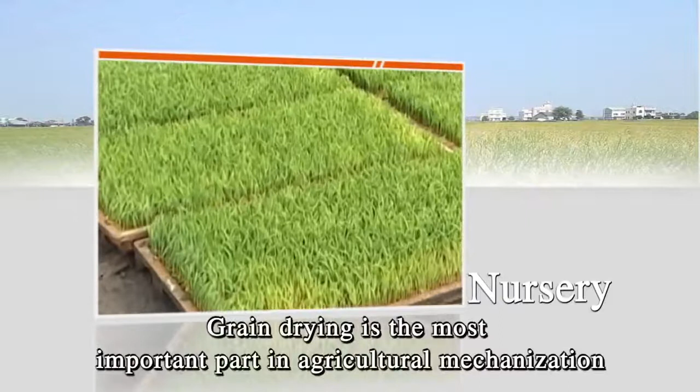Grain drying is the most important part in agricultural mechanization. It not only solves the grain mildew problem, but also enables people to eat fresh, clean, and healthy rice. Grain drying mechanization also ensures that farmers have complete control over the harvest.

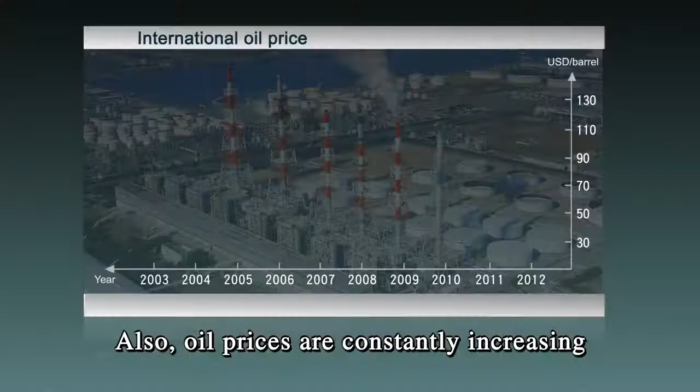Fuel-type grain dryers consume a lot of energy and produce lots of carbon dioxide. Also, oil prices are constantly increasing. Therefore, the increase of drying costs becomes farmers' biggest burden. For those countries with lower grain prices, farmers can afford to buy dryers but cannot afford to buy diesel.

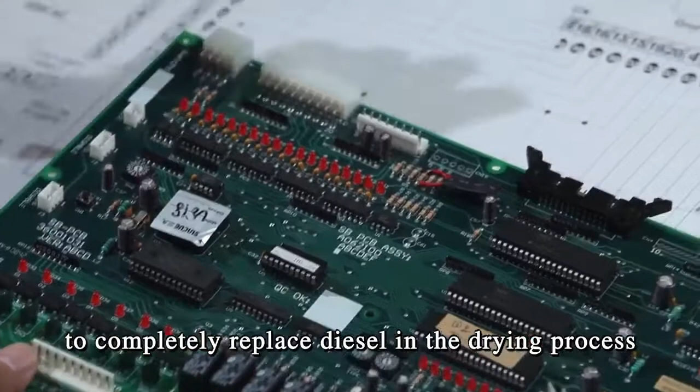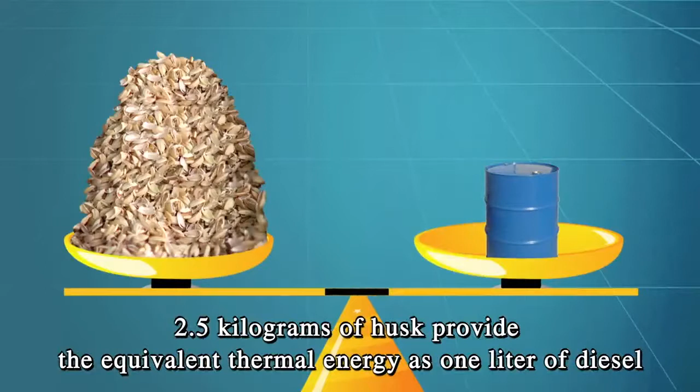In order to help farmers reduce high fuel costs when drying and decrease carbon emissions, SUNCUE has successfully developed an innovative and patented technology by using paddy husk to completely replace diesel in the drying process. Husk is the hull of paddy, which is also rural waste, but contains high thermal energy. The thermal energy generated by 1 kilogram of paddy husk is about 3,000 to 3,500 kilocalories. 2.5 kilograms of husk provide the equivalent thermal energy as 1 liter of diesel.

SUNCUE Husk Furnace has earned the patent on complete combustion technology. Husk milled from 1 hectare of paddy can dry 3 hectares of paddy, and husk from 1 ton of paddy can dry 3 tons of paddy. This triples the efficiency.

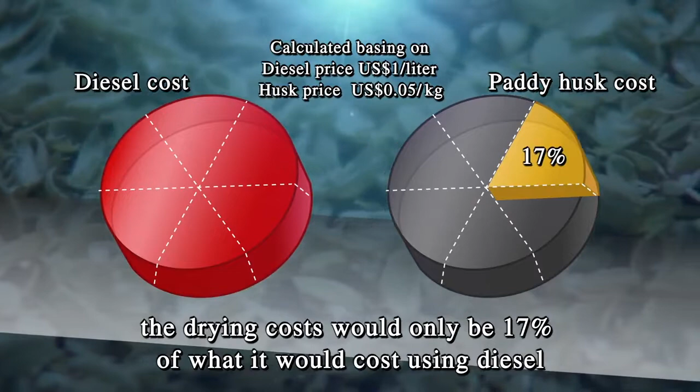The annual production of paddy, corn, and wheat in China is 474 million tons, which consumes fuel expense of about $69.5 billion US. If we use paddy husk to replace the diesel in drying, the drying costs would only be 17% of what it would cost using diesel. Costs are also far lower than drying by sun, and the rice quality is much better. Paddy husk is biomass energy, and its net carbon emission is 0.

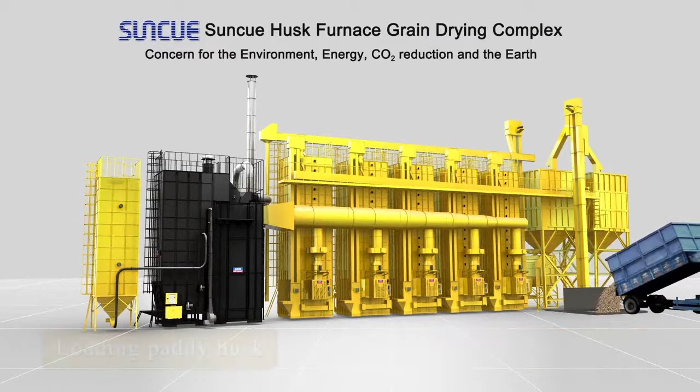After harvest, the farmers deliver wet grains to a SUNCUE Husk Furnace drying center. During the loading, the furnace's computer will auto-calculate the required husk feeding volume and blow into the furnace. Then the hot air will pass through heat exchangers, and only clean air will be sent to dryers.

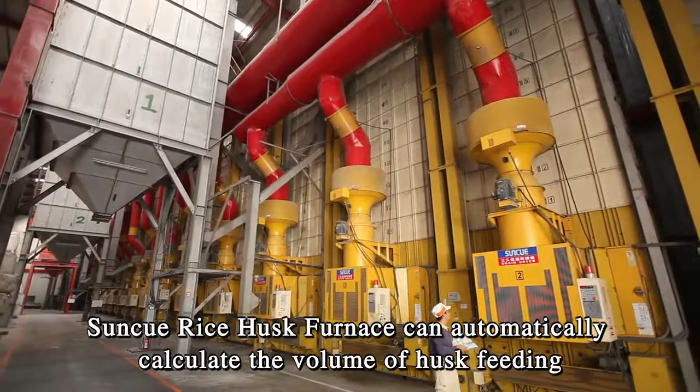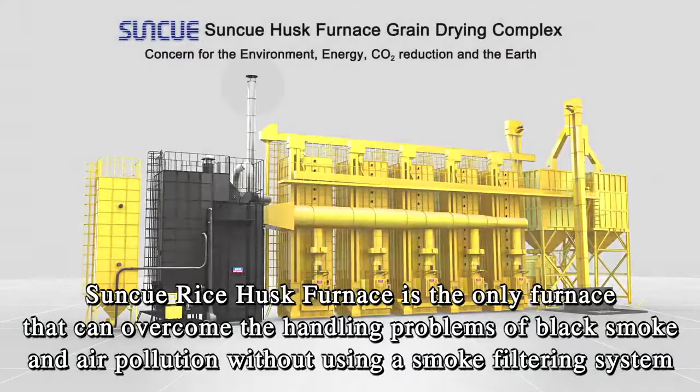SUNCUE Rice Husk Furnace can automatically calculate the volume of husk feeding, auxiliary air, hot air, and ash discharge based on the operating dryer units and the hot air temperature setting, so the husk is under perfect combustion. SUNCUE Rice Husk Furnace is the only furnace that can overcome the handling problems of black smoke and air pollution without using a smoke filtering system.

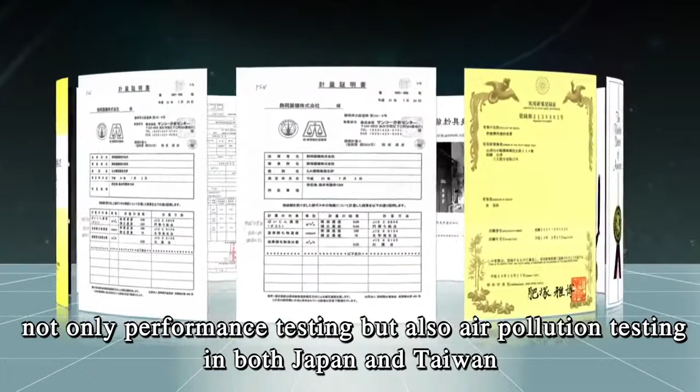In addition, SUNCUE Furnace is exclusively passing not only performance testing, but also air pollution testing in both Japan and Taiwan. SUNCUE Rice Husk Furnace uses a negative pressure and indirect heating system, which neither contaminates grains nor corrodes the dryers.

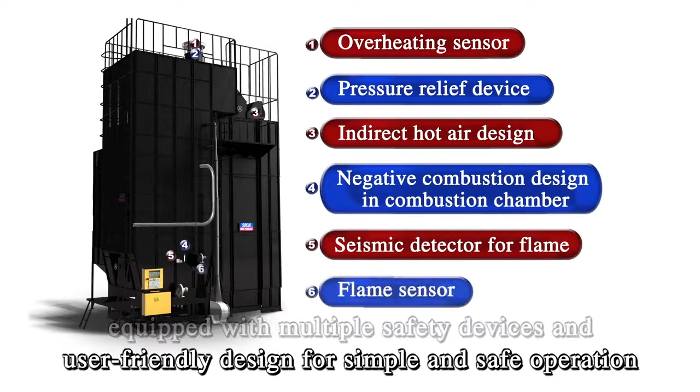SUNCUE Furnace is also exclusively equipped with multiple safety devices and user-friendly design for simple and safe operation.

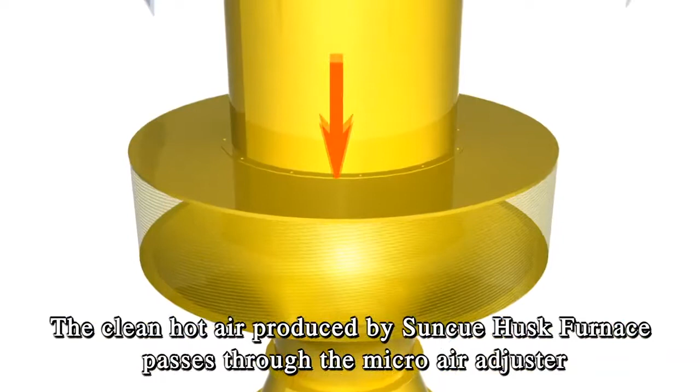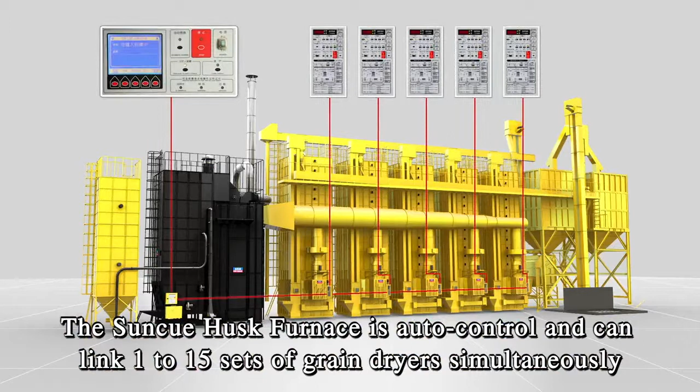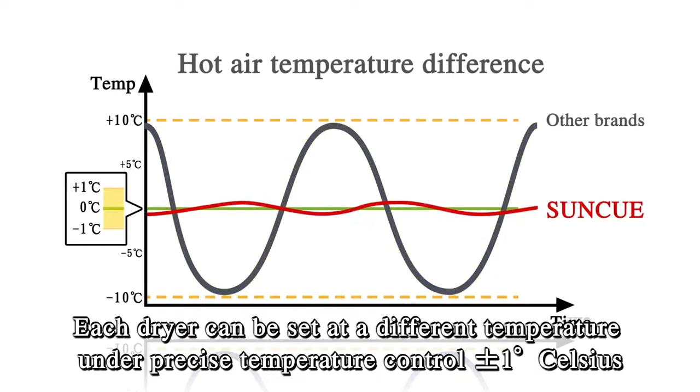The clean hot air produced by SUNCUE Husk Furnace passes through the micro-air adjuster, mixes with cold air evenly, then enters into grain dryers. The SUNCUE Husk Furnace is auto-control and can link 1 to 15 sets of grain dryers simultaneously. Each dryer can be set at a different temperature under precise temperature control, plus or minus 1 degree Celsius.

SUNCUE husk furnace drying complex utilizes fully automatic control. Thousands of tons of grains can be managed by a single operator every day. By applying even, low temperature and speedy drying techniques, grains can benefit from high quality, high price, and high germination rates. Ash can also be used as organic fertilizer, soil improvement, or heat insulating material.

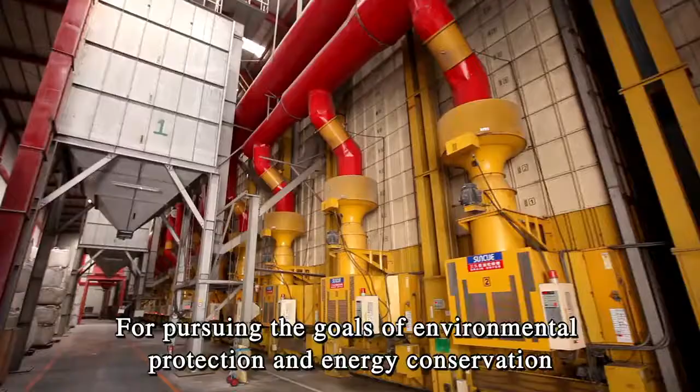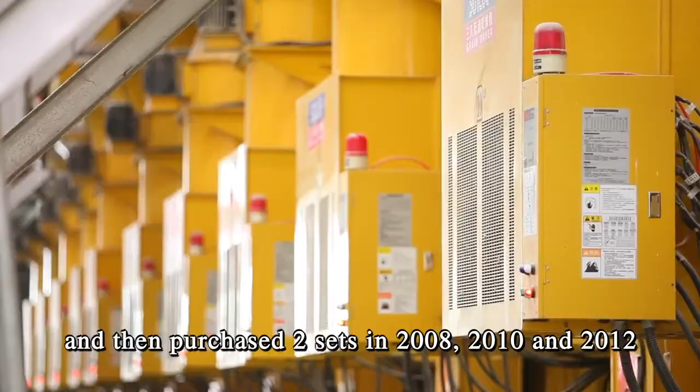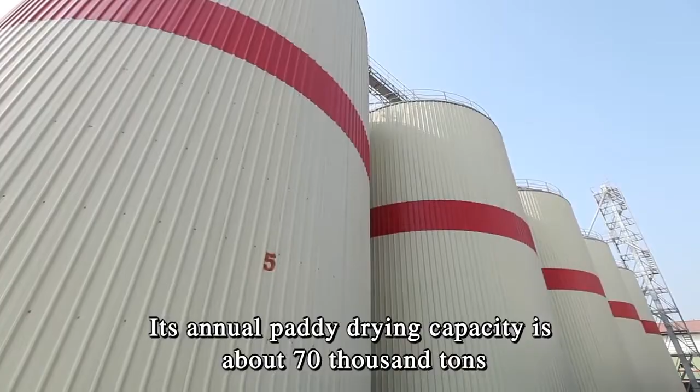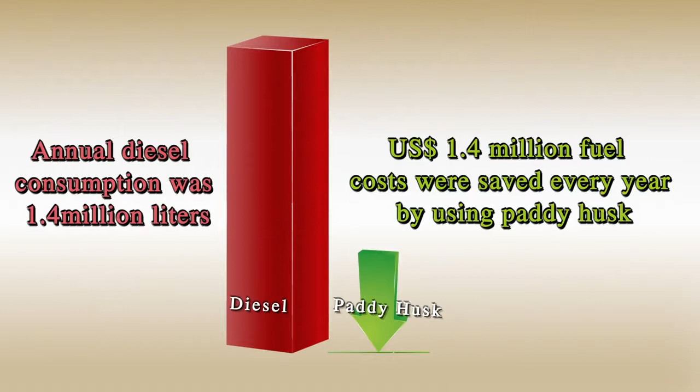Its annual paddy drying capacity is about 70,000 tons, which consume around 1.4 million liters of diesel. $1.4 million of diesel expenses were saved after using self-milled rice husk. 3,780 tons of CO2 emission was also reduced as a result. Union Rice is praised as an advanced green enterprise, and its high-quality rice has been successfully exported to Japan.

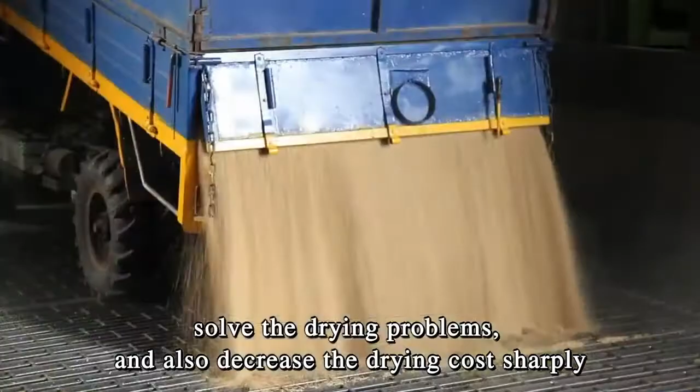We started using SUNCUE husk furnace in 2008. It helped us dry wet grains for all farmers in town, solve the drying problems, and also decrease the drying costs sharply. This husk furnace brings us high quality and higher price small package rice, and also an enormous increase in sales. We are all very satisfied.

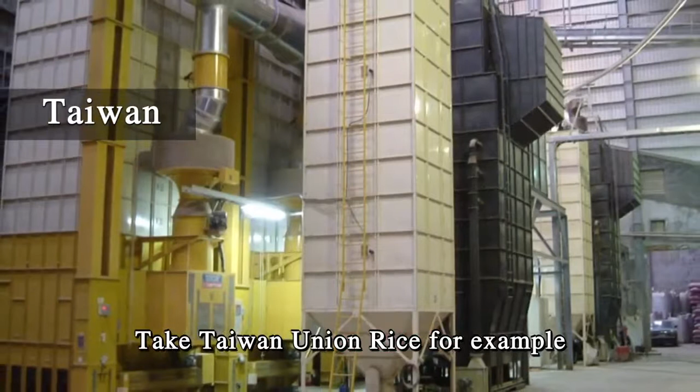SUNCUE husk furnace grain drying complex creates the best rice quality at the lowest drying cost. In Taiwan, SUNCUE has many successful installations among all farmers' associations and rice mills. Take Taiwan Union Rice for example: they use SUNCUE husk furnace 120 days per year, and each set can save fuel cost up to $175,000 each year.

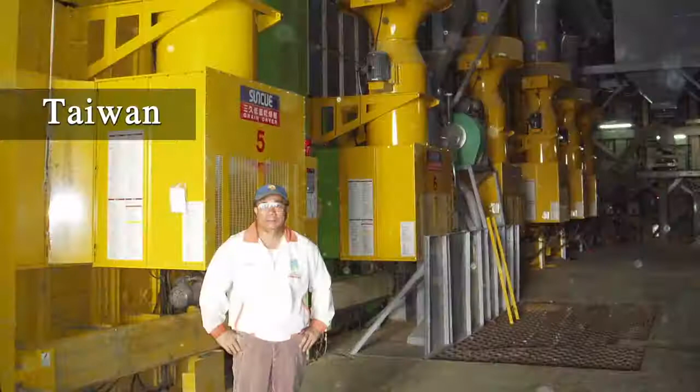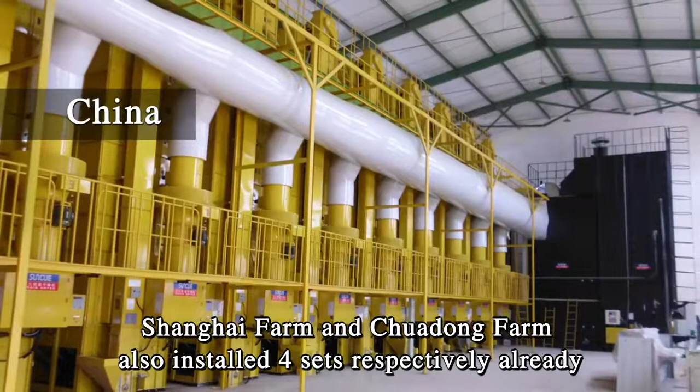The Liaoning Dingxiang rice mill in China uses SUNCUE husk furnace 270 days per year and saves $450,000 annually. Shanghai Farm and Chuadong Farm also installed 4 sets respectively already.

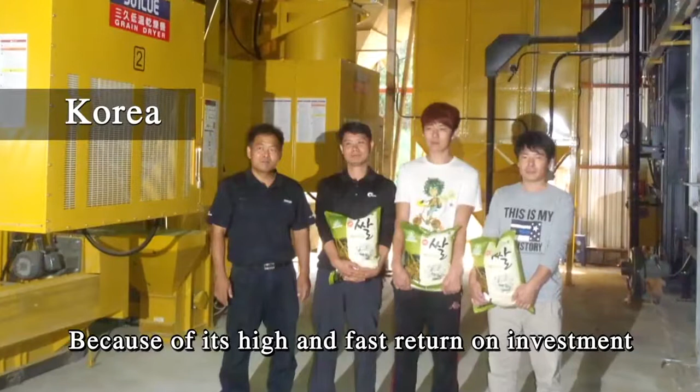SUNCUE husk furnace has successfully exported to Japan, Southeast Asia, Europe, Latin America, and other countries. Because of its high and fast return on investment, as well as its excellent performance in energy conservation and CO2 reduction, our customers consistently purchase and expand their business scale.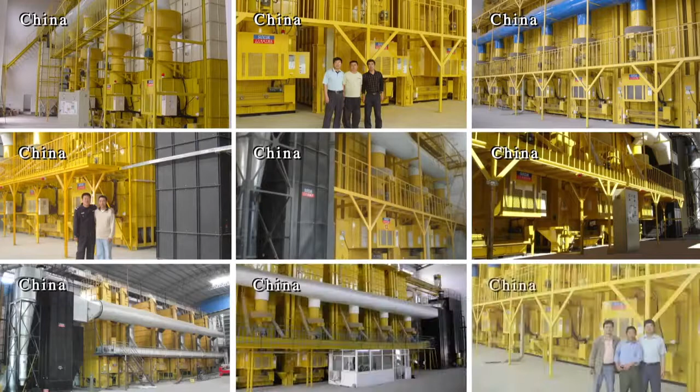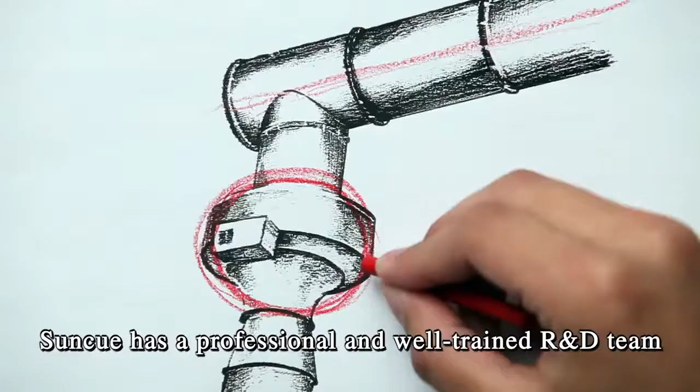SUNCUE, established in 1966, is the leading manufacturer of grain dryers with superior research and development capability. SUNCUE has a professional and well-trained R&D team who specialize in hydrodynamics, thermodynamics, combustion, and mechatronics. We also use 3D computerized design in drying technology.

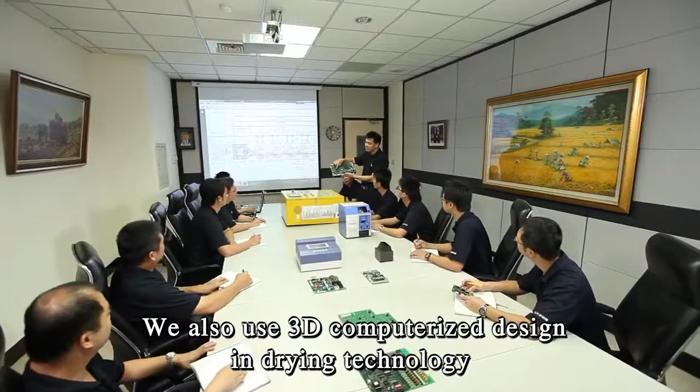SUNCUE implements module-based, standardized, and automatic production. We insist on high quality and steady performance of products.

With advanced R&D competences, SUNCUE husk furnace was awarded the National Invention and Creation Awards Contribution Award, Taiwan Excellence, Small and Medium Enterprises Innovation Award, Scientific and Technological Agribusiness Excellent Innovation Award, and the Gold Medal at the iENA Nuremberg 2012, Germany.

Meanwhile, SUNCUE Shanghai has been awarded the following prizes and honors: High-Tech Enterprises in Shanghai, Contract Credit Rating AAA Enterprise, Shanghai Minhang District Model Unit, Foreign-Funded Enterprises with Advanced Technology, Harmonious Labor Relations Enterprise, and Trustworthy Enterprise by Shanghai Customs.

Only SUNCUE grain dryers are successfully exported to Japan, Korea, and more than 40 countries.

The motivation of SUNCUE's continuous research and innovation comes from our values: 道心之中有衣食，衣食之中无道心。道心 is the heart of nature, meaning to be concerned about human beings. We believe that if the starting point of the company is to make a great contribution and help society, then naturally the society will give you good feedback in return.

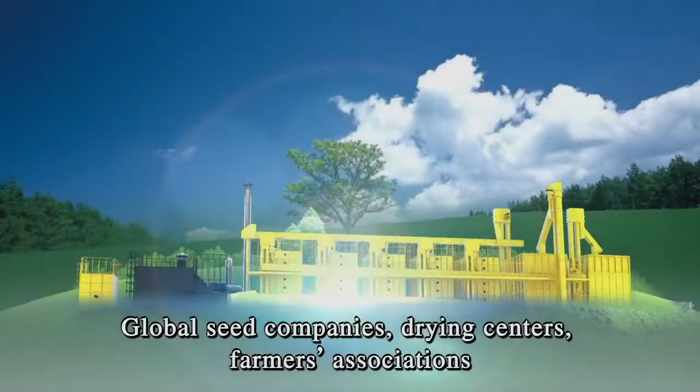Global seed companies, drying centers, farmers associations, rice mills, and farmers have been utilizing SUNCUE Husk Furnace Grain Drying Complex to reach the goal of environmental protection, energy conservation, CO2 reduction, and to bring a bright future to our planet.

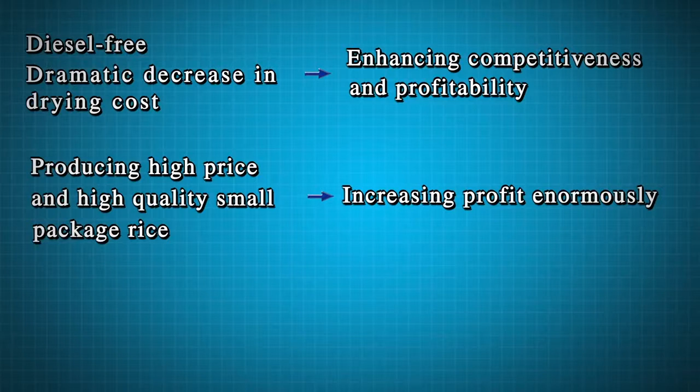According to the proof of SUNCUE's worldwide customers, SUNCUE Rice Husk Furnace is the only solution for diesel-free, dramatic decrease in drying cost, enhancing competitiveness and profitability, producing high-price and high-quality small package rice, increasing profit enormously, energy conservation, CO2 reduction, concern for the earth, and becoming the role model of green enterprise.